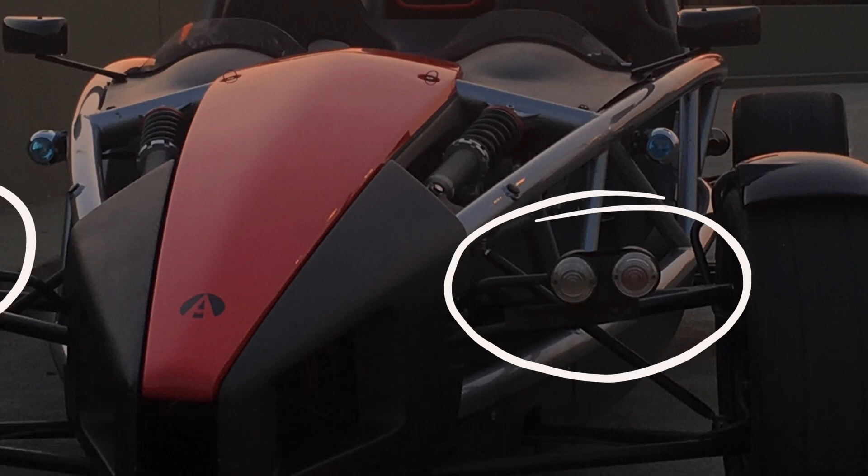What's wrong with this picture? If you say, nothing, that's a beautiful car, well, you probably wouldn't be wrong, but as the owner of the car, there's one thing that's always bothered me, and that's these lights right here. They're really not as cool as the rest of the car is, and I'd like to fix that.

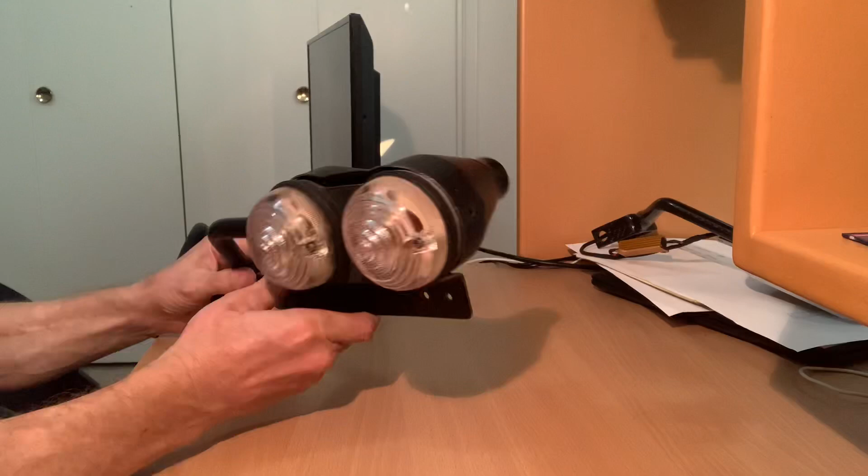So here you have that light removed from the car and on my desk here. And what we have here is a couple of lights mounted on a steel bar. One of them is the running light, and the other one is the turn signal. And it's kind of heavy and bulky, and it's got this cheap plastic covering on the outside. It's really weak. It's broken, and on some of the other lights on the car, it's broken even worse.

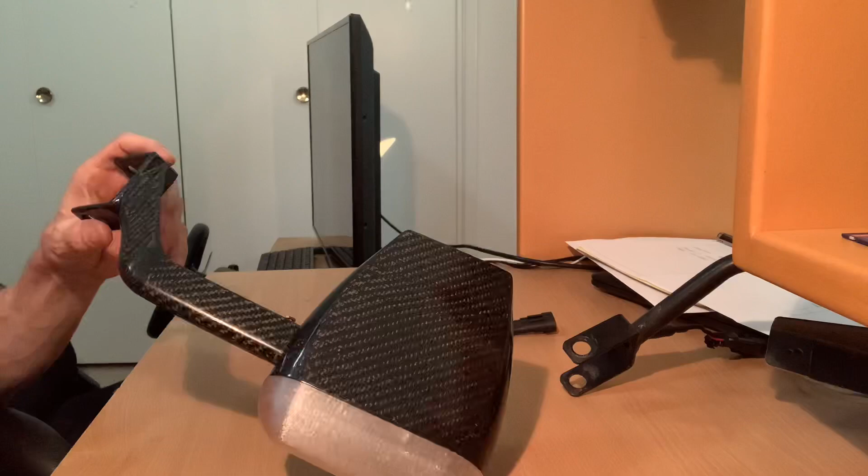Really needed to do something about that, and decided that the right thing to do is just redesign the whole part. So here's what I've come up with. What I did was I 3D printed this and then wrapped it in carbon fiber for strength and appearance, and designed it from the ground up myself, and pretty happy with how it came out. My goals were to have it be aerodynamic, use LED lights, and to not have any visible screws on it.

I also wanted it to mount to the stock mount and use the stock plug for the electrical, so no modifications to the car itself. It could always be switched back. And it turned out that this replacement part is less than half the weight of the original, so pretty happy with that. Here it is all taken apart.

So what we have here is the lens that goes on the front. It's kind of opaque, it's not perfectly clear. And this is the arm that holds it on. This is printed with carbon fiber nylon filament, which is super strong and light. And then, of course, wrapped with carbon for appearance and more strength. This is the main light fixture, and it holds the light and the lens and everything together.

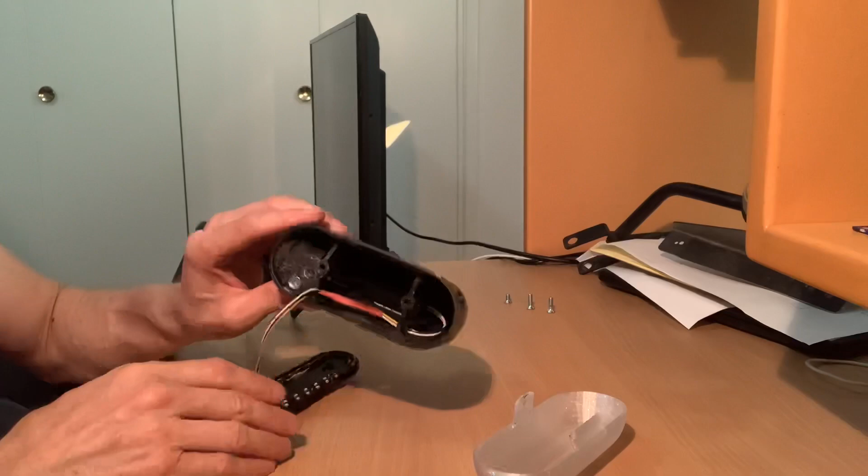And inside of it, I don't know if you can see, but there's a little black box there, and that's the electronics that handle the lights. So if you've got the running lights on and you hit the turn signal, it switches from one to the other, and it works great. So that's cool. And this is the little piece with a spiral-shaped groove in it for the LED strip light to live in.

So the way it works is this arm slips in, and there's a clamp there where that screw is, and that tightens it up, and it's 3D printed with threads that work really good. So that tightens down on the arm, and it holds it really solid. This is just a little electronic piece that prevents the flashers from going really fast because it is LED lights. Something you got to do.

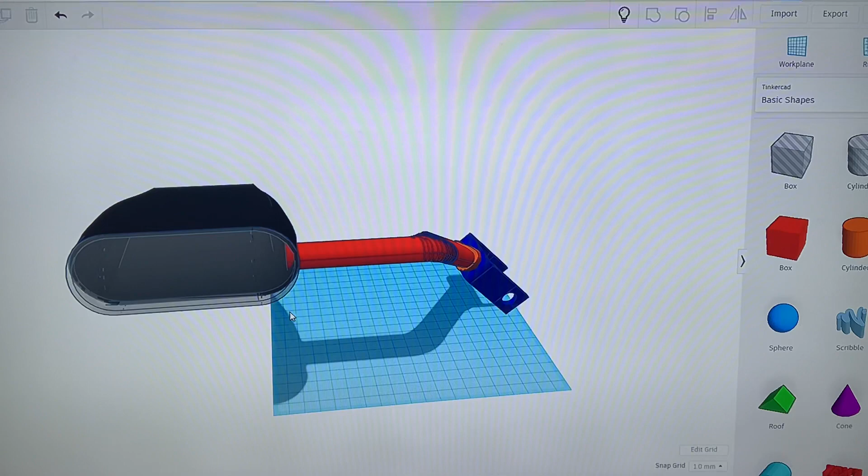So I wanted to show you how I designed it. I designed this thing on a free software called Tinkercad, and that's what we're looking at here. This is the basic design of the whole thing. It does not include some of the details, but you get the idea. This is pretty close to final. And then here is the final of the whole thing, except for the arm and the mount.

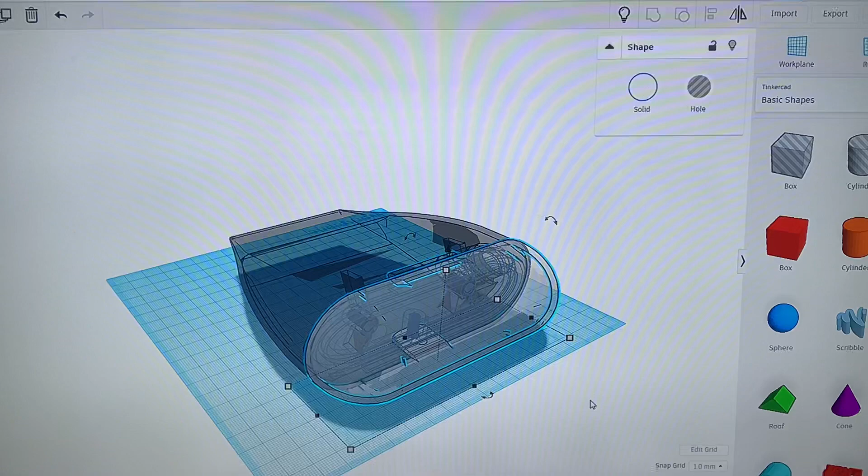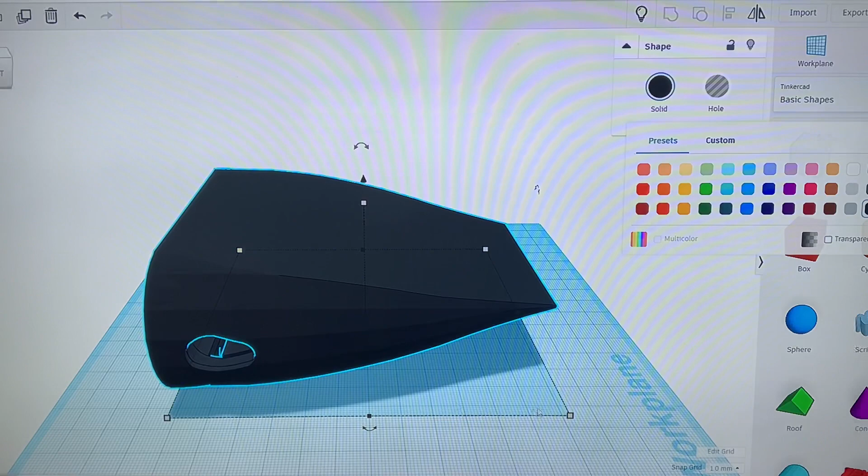On the front, here's the lens. I'm going to make that disappear. And then you can see the other two parts. There's the spiral light holder inside of the main part of this light. And I've got it transparent so you can see all the threaded parts and stuff. And let's see, there's the main light. I'm going to make that disappear so you can see the whole thing.

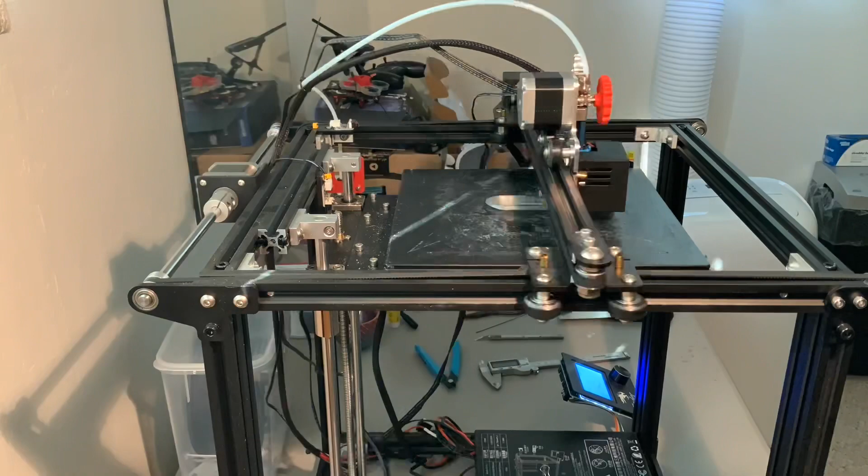That's the finished part. It took a lot of time to get this done, but it was a lot of fun. It's challenging. And once you've got a part that's ready to go, next step is to 3D print it. So here's the printer on a time-lapse video printing out the lens that goes on the front. This was about an hour and a half print job that you're going to see here in about 20 seconds.

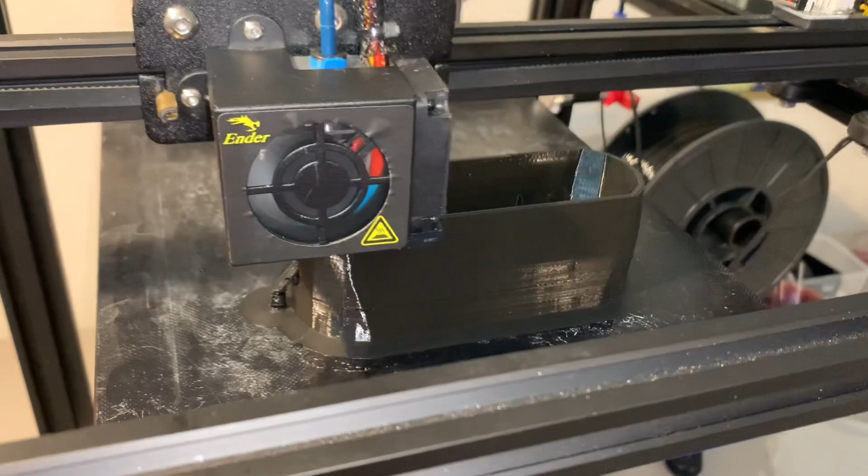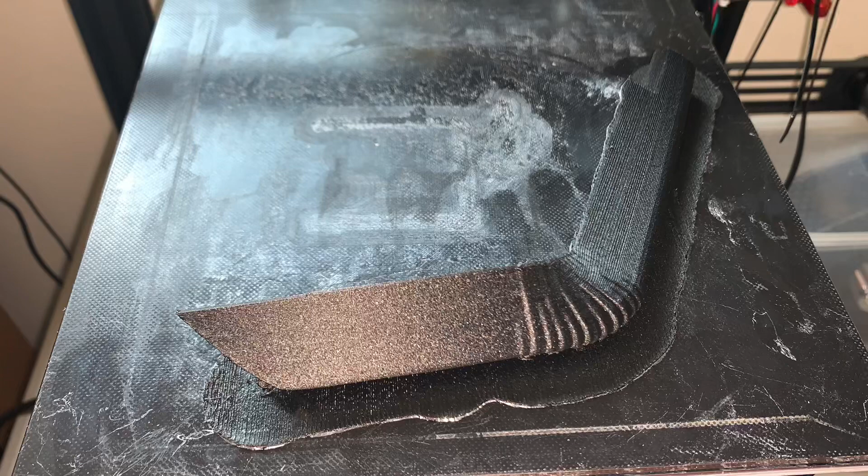Prints don't always come out perfect on the first try, but try again. Here's the printer working on the main part of the light. This is fast forwarded. It doesn't actually quite move that fast in normal prints. And after about 4 hours, here's your finished part on the print bed. And then this is the carbon fiber nylon material that I used for the arm and the mount.

Once you've got your parts printed out, the next thing to do is wrap it in carbon fiber and vacuum bag it down so it's strong. And here I've got the carbon fiber material with some spray glue on it so it'll stick to the part. And I'm going to stick it on there and get it right, maybe trim it a bit. And then I've got some blocks that go on the inside to protect it from collapse.

And then the next step is going to be to mix up the two-part resin. You put your gloves on to do that, and then put the resin on the part itself. Brush that on, get it everywhere, and then get it ready to put inside the vacuum bag. Will happen after the resin goes on. This is some perforated release film that goes on, and then after that will be the breather cloth, and this is all part of the vacuum bagging process.

And then all of this goes inside wax paper, and then inside the vacuum bag, seal up the vacuum bag, and then attach the vacuum hose, and then pull the vacuum down, leave it for about 8 to 12 hours, and then this is what you get. The purple part is a plug that I had to put on there, and there's parts like that all the way on the inside to protect it from the vacuum bag crushing the part, because the bag's really strong. And here's how I learned that the hard way. My first try, smashed it.

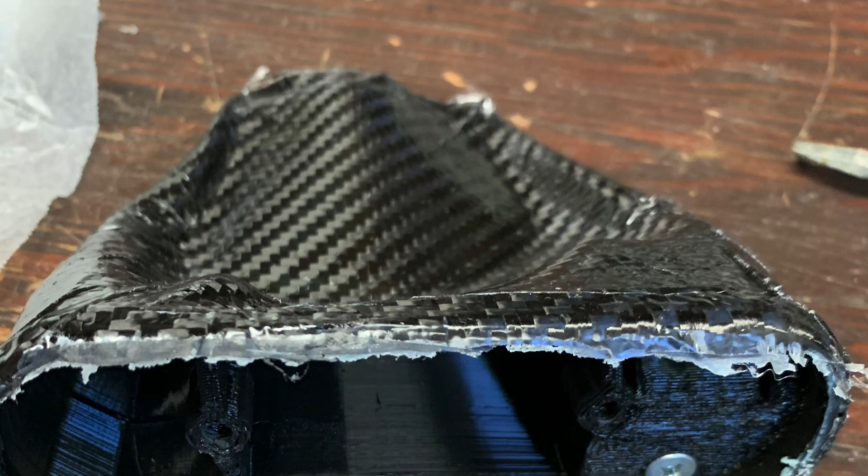So the parts come out of there looking pretty good, but not nearly finished. You can see here, this is fresh out of the bag. It's going to need a lot of finish work, and that mostly means sanding, and sanding, and more sanding. This is my least favorite part of a project like this, but it's necessary. So there's sanding after it comes out of the vacuum bag.

You get that fixed, and then you might have some little repairs to do, and then finally it gets good enough, and then I want to clear coat it, and so I spray the clear coat on, and then of course that's got imperfections in it, and it requires sanding and more clear coat and more sanding, and yeah, I think you get the gist. Lots of sanding. I sanded till my fingers bled, but that's what you got to do if you want it to look good.

So the final step is to paint the clear coat on, and what I was going for here was not a super high gloss finish, and not a flat finish either, but a semi gloss, and that's what I've done. I'm pretty happy with how that came out. At some point, you just got to say enough already, and be done with it. So I'm happy with it.

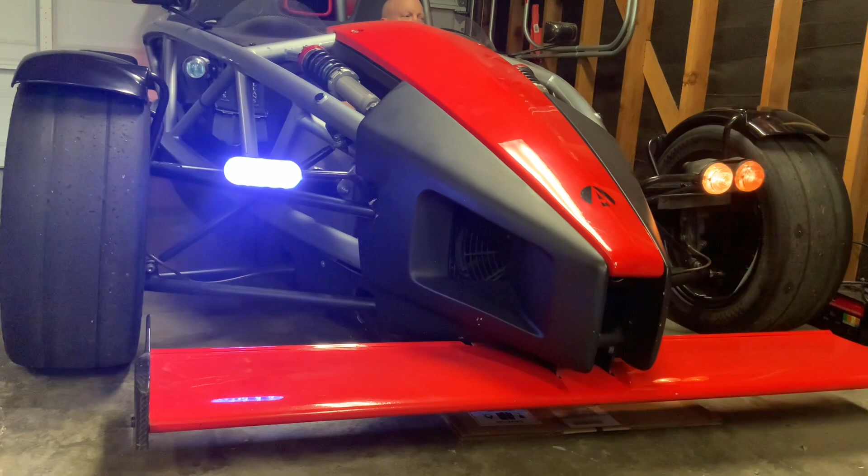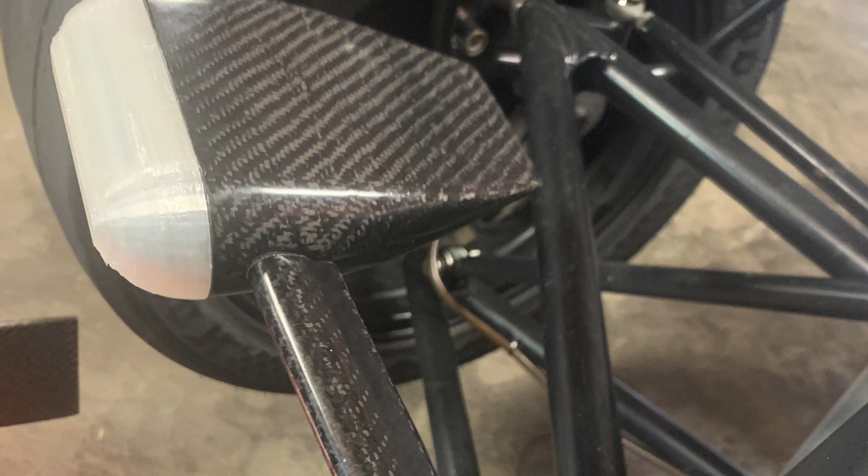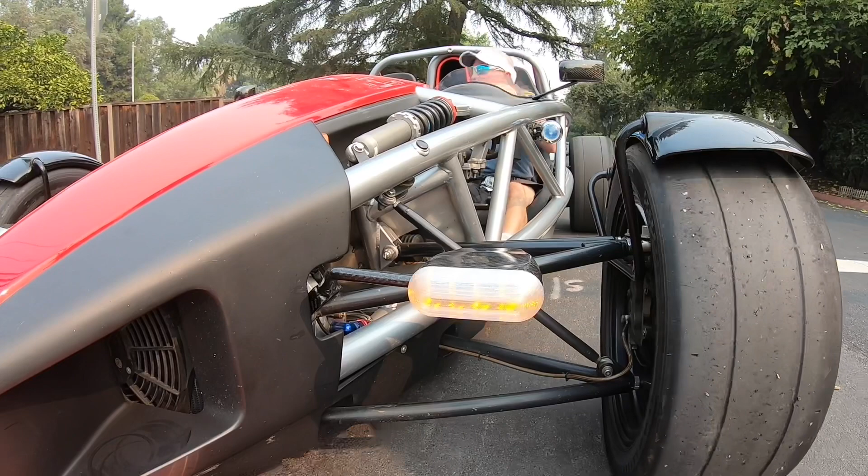Here it is on the car. Obviously, the old lights on the left side of the car, and the new one on the right, just showing off how they each work, and how the running lights and the turn signals work together. So overall, it came out good. I'm really happy. So the only thing left to do is the best part of any Ariel Atom project, that is the test drive. So enjoy.